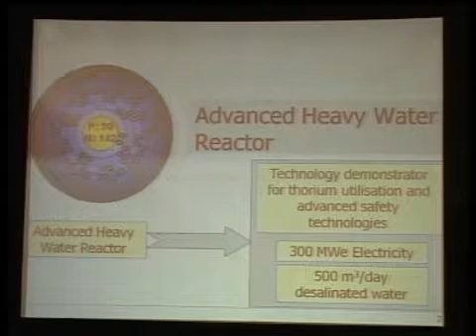We do produce electricity, 300 megawatts. In addition, desalination capability using the low grade heat coming from the steam cycle.

I have already indicated thorium utilization. These are the major design objectives: thorium utilization and associated technology development. And this reactor, why we have configured it the way I am going to describe a little later.

Basically, a boiling water cooled reactor, pressure tube type of configuration, vertical geometry. We thought we should better make use of the well known pressure tube reactor technology, which we have been operating for such a long time, building also for such a long time.

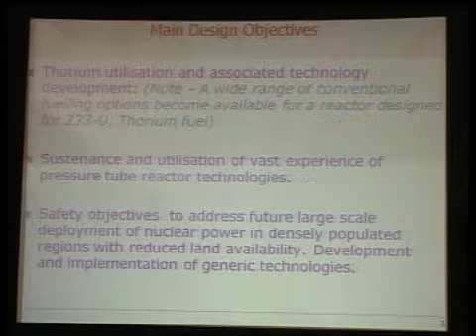We are having 18 pressurized heavy water reactors under operation today. 4 of them are now under construction, covering a range of 220 megawatt to 540 megawatt under operation, and 700 megawatt under construction.

Now, having defined this, when we thought of thorium as the main platform which will be used for this type of reactor design, we conceived that for large scale deployment of thorium, which will be the mainstay of the Indian program in the future, and also which we feel in the post uranium era, thorium could provide a very valuable role in continued sustenance of nuclear power.

We felt thorium will come into picture, really speaking, when the number of reactors in the world have grown very, very large, particularly in our country. Surely there is a huge requirement, and so you have to cater to a scenario when thorium exists.

Also, we have to cater to a scenario when a large number of reactors exist, and that's where for a densely populated country like India and many other parts of the world, we have to have some kind of more detailed thinking about the kind of reactor we must be building.

And we can't be certainly demanding sufficient land to provide for the exclusion radius, and around the exclusion radius, sufficient amount of restrictions perhaps in the emergency planning zone, which as we know today is going to hurt us even in the very near future.

And therefore, the last bullet you can see: the safety objectives of this reactor address future large scale deployment of nuclear power in densely populated regions with reduced land availability. Development and implementation of generic technologies meant for this purpose were a part of this AHWR design.

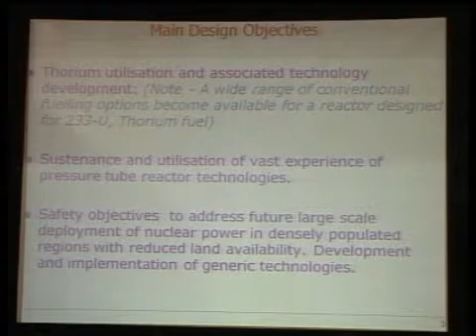We thought of it 2 decades ago, but post Fukushima this seems to be so relevant today. Well, I already said this is a 300 megawatt reactor, vertical pressure tube type, boiling light water cooled and heavy water moderated reactor. Why boiling light water?

Because we felt pressurizing heavy water per se means you have to contend with a system for recovery of tritium as well as the heavy water, which will certainly come out from some of the points, and this is a costly system.

You don't allow it to go away, but you have to recover it. Secondly, in presence of thorium, the large absorption cross section in light water really doesn't matter much. Thorium itself absorbs neutrons, so the contribution of light water vis-a-vis heavy water as a coolant really doesn't make much difference.

That's where the boiling light water coolant makes life very simple. The boiling light water can go straight to the steam drum, and unlike a pressurized heavy water reactor, we do not have a steam generator in the way. This produces 65% of power from thorium in this plutonium-thorium version.

As I said, this reactor can be designed for a range of fuels. Another version I will be talking about is the low-enriched uranium and thorium version, where the percentage of power from thorium will be somewhat lower. There are several passive systems I will come to, one of the most important being a passive shutdown system to address insider threat scenarios, which I'll touch on a little later.

It has a design life of 100 years. In fact, other than the zirconium alloy components which cross the core, there is nothing which really degrades. We have made sure in the choice of materials, in the choice of pre-stressing for the reactor structures, and most of the welds are now under development for very low residual stress configurations. Therefore, we are now reasonably sure that this design life can be achieved, with a lot of in-service inspection and maintenance capability.

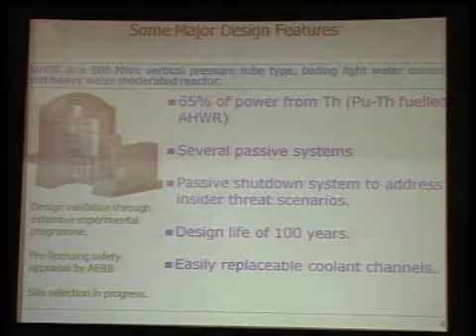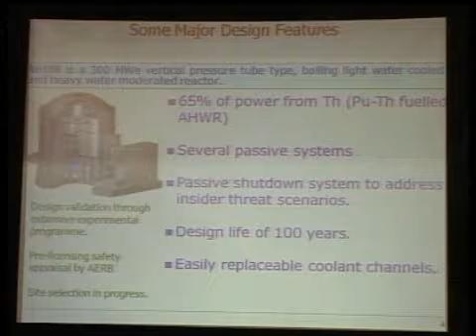On the left-hand side, you can see the status. The design validation has been carried out through an extensive experimental program. We had a peer review of the design done by the Nuclear Power Corporation of India Limited quite a few years ago, and in-principle pre-licensing safety appraisal was conducted by AERB. They suggested quite a lot of improvements or further validations, and all that has been done. Site selection is in progress for this particular reactor.

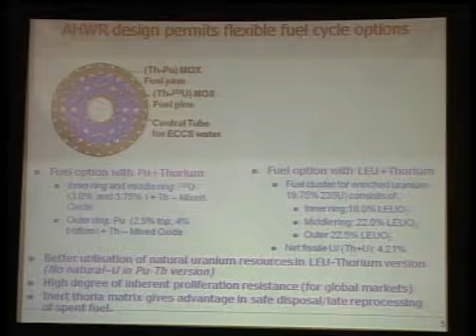Well, this shows the fuel cluster. You can see there are 3 rings. If we are using thorium and plutonium, the inner 2 rings, the blue colored ones, contain fuel which is mainly uranium-233 based fissile material and thorium, and the outer ring contains plutonium.

On the other hand, if you use low enriched uranium, then you have low enriched uranium in all 3 rings, because we provide 20% of the fuel in the form of uranium, which is itself 19.75% enriched, and the balance 80% is just thorium oxide. So the fuel contains some amount of U-238, some amount of U-235, and mostly thorium.

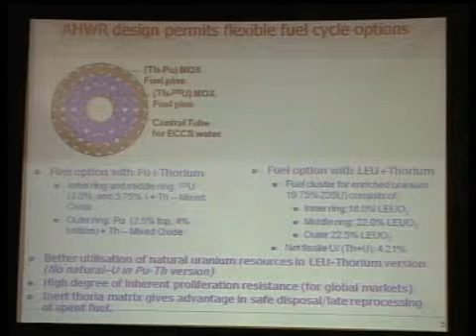In both configurations, you can see in the two columns information about the enrichment values, typically around 3 to 4% enrichment. One important feature is that the uranium-233/plutonium enrichment is in the outer shell of the plutonium option. We are providing a kind of variable enrichment.

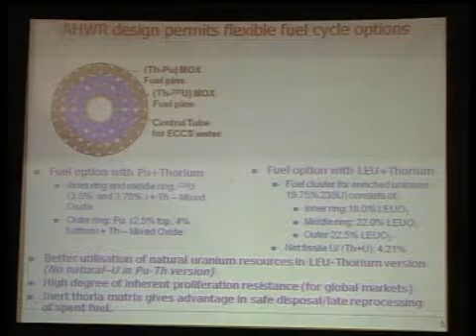The bottom, where you have mostly the water phase, has higher power density, so we provide 4% enrichment. The top of the fuel is enriched only to 2.5% to match the heat generation with the heat removal capability, which is mostly a steam-water mixture at the top.

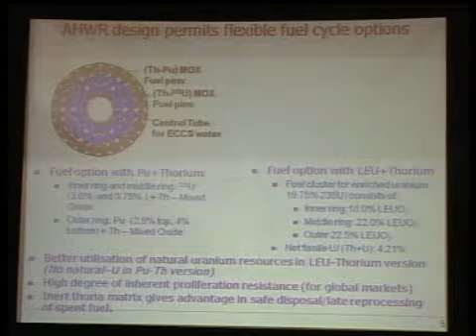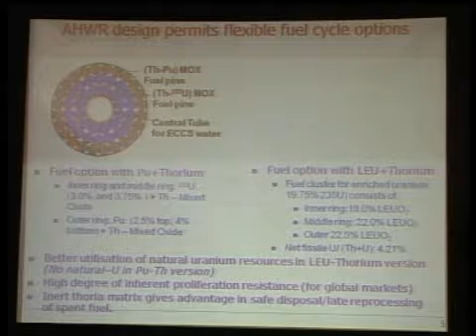We have carried out several fuel cycle calculations, which I am not going to include in this presentation, but it does turn out that it makes better use of the natural uranium. After all, if most of the power comes from thorium, you would only expect to have this kind of scenario. Thorium provides inherent proliferation resistance for those markets where it really matters, particularly if you look at the low enriched uranium thorium version.

To begin with, if somebody does reprocessing, if he is at all able to dissolve this fuel—very difficult to dissolve this thorium oxide—whatever he gets in hand will be low enriched uranium at 19.75%, considered good enough to be proliferation resistant, a kind of diversion-proof material, and the balance is all thorium.

The same fuel, after irradiation to 64,000 megawatt-days per ton, which is our target burn-up, will contain as much as 8% plutonium, with 8% of that being plutonium-238. The total plutonium will actually be less, because you start with only 20% uranium, so the amount of plutonium produced is one-fifth of what it could otherwise be. Minor actinides are also not built up, because you start low down the ladder with thorium. So there are several other issues associated with long-term disposal which are very favorably addressed here.

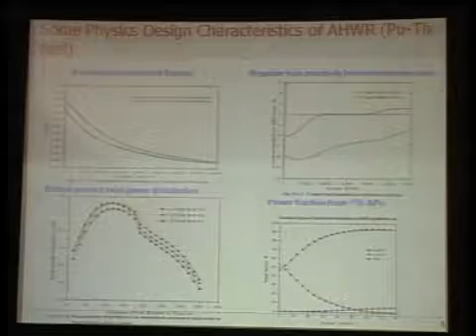To address the slightly positive void coefficient of reactivity, which happens if the coolant tends to boil off—and in this case, since it's a boiling water reactor, boiling is intended to happen—we decided to have a negative void coefficient for the entire range of operation, and this has been achieved with a lot of great effort.

On the bottom left hand side, you can see the bottom-peaked axial power distribution. This is because of the two levels of enrichment in this particular fuel for plutonium. Therefore, more power is produced in the bottom half, where water resides, since most of it is actually water, and steam starts forming midway upward. So it makes good sense to have a differential enrichment for the fuel.

The bottom right hand shows the proportion of power shared across plutonium and thorium. You can see the red curve—plutonium starts burning very fast and gets depleted. Some people say it can be used for plutonium incineration. Although we are not in that business, we wish to use plutonium for the fast reactor program rather than for incineration. But still, for some people, it could make sense.

Uranium-233 keeps increasing in terms of share of power, reaching almost up to 80% towards the end. But on average, as I said, it produces about 65% of power across the core with different burn-up configurations. Interestingly, some power also comes from uranium-235, because uranium-233, after absorbing a few neutrons, climbs up to uranium-235, which also tends to start producing. That's the bottommost curve, which starts showing up after some time.

Now for safety, because this is the main theme of this particular talk—what should we do for safety? Fukushima is glaring, but of course all this was decided long back.

The first important requirement is that you must be able to shut down the reactor under all conditions—whatever happens, you should be able to shut down. And as I said, in pressurized heavy water reactors, we already have two fast-acting shutdown systems.

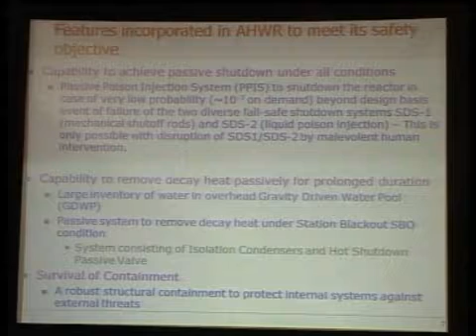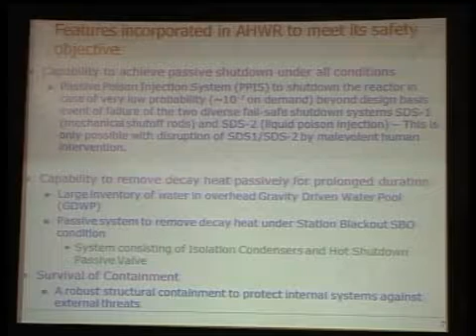Here, in spite of having a negative void coefficient, we have retained the two systems. One mechanical shutdown system: a clutch gets released if a power failure takes place or under some signal condition, and the mechanical shutdown rod drops. And a liquid poison injection system: once again on a signal, the liquid poison gadolinium nitrate, stored in a high pressure vessel, enters the core through nozzles.

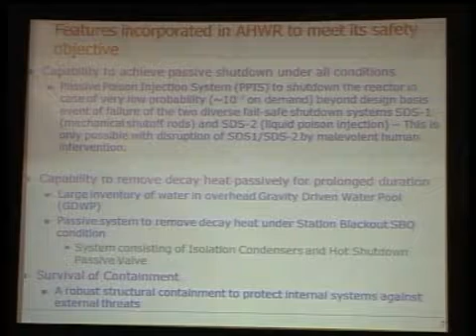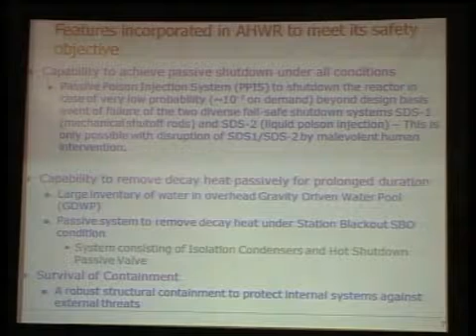Failure of both systems together is extremely low, 10 to the power minus 7 on demand. If there are 1,000 reactors operating for 1,000 years, even then you will not get one failure of both happening together. So then why are we considering a scenario of non-availability of both SDS1 and SDS2?

It's again a kind of scenario one could find in a large scale deployment scenario, with a very large number of reactors, where some odd things may happen. That odd thing is an insider threat, which I think one cannot perhaps rule out. Today we can provide enough physical security—it exists—but one could consider that electronics is something one could play with. Therefore, we assume a scenario of both SDS1 and SDS2 failing, and that's where a passive poison injection system comes into action.

Now, once you are able to shut it down, whatever happens, there is an important requirement to remove the decay heat. The bottom line in Fukushima was not the earthquake nor the tsunami—it was station blackout. We have to have a scenario where, without any power in the reactor, you should be able to remove the heat from the core, and that's where the passive systems come into action.

This has been proven even in existing reactors—particularly in our country, we have demonstrated enough margin for removal of heat after station blackout. Time-wise, we have enough margin, and in that time frame, one could bring in additional sources of cooling. But I'm talking about AHWR, where we have deliberately designed it to accept a very large period of station blackout, as mentioned here.

Ultimately, the containment must survive whatever external threats come, whether earthquake, tsunami, or any external aggression, because that's where all these passive systems are located. These are the three primary requirements which any reactor in the world, if it possesses, will be safe against most threats: internal, external, and man-made threats, which is most important.

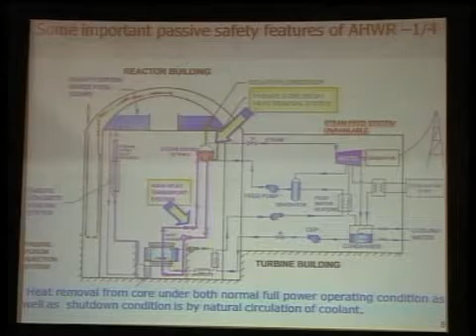As you can see, if you look closely, there's a desalination plant heat exchanger also sitting there. But the green line, the long arrow on top, indicates the path taken when there is a failure of the decay heat removal through the normal mode of the condenser.

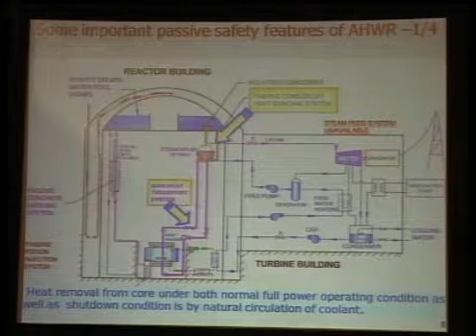Using natural circulation, decay heat can be easily removed in a large pool of water sitting right at the top - about 8,000 cubic meters of water inventory - which serves as the heat sink for a range of scenarios, and also provides the emergency core cooling system water for low pressure injection purposes.

Talking about the emergency core cooling, you can see the sources of water. Plenty of arrows there - one points to the top, one points to the emergency core cooling system high pressure injection. There is high pressure water injection in case you have a failure of the piping, cutting in at 50 bar pressure.

Further down, at about 5 bar pressure, you start getting water from the gravity driven water pool. We have not shown here, but we have a passive depressurization system to hasten the transition from accumulator to the gravity driven water pool, which contains practically unlimited water to survive for a very long period.

We also have a passive containment isolation system, so that if the environment inside has high pressure, the U-limb you see gets filled with water. So even without any power, if we are unable to close the ventilation dampers, these dampers get sealed by this water seal, and the environment inside is isolated from outside - you do not have to release radioactivity outside through this route. It can be done only in a controlled manner, which is anyway provided.

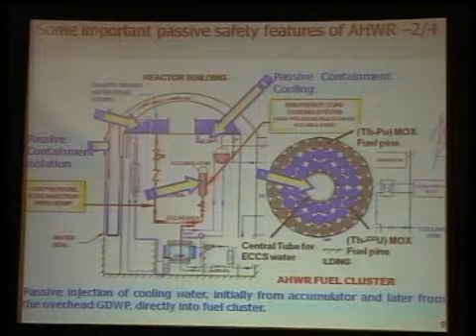This ECCS water, as you can see in the fuel sitting on the right hand side, gets injected right into the fuel through perforations, and that's where it's required and cools right there.

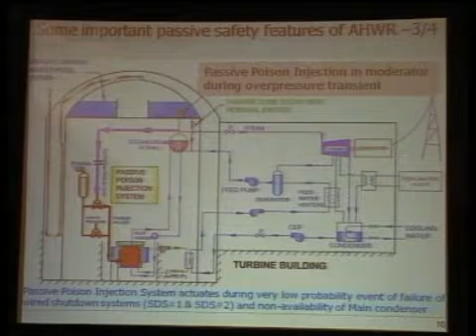Another feature is the passive poison injection in the moderator. Once there is a mismatch between power generated and removed - in any region, it could be a reactivity transient, control rod withdrawal without cause, or any reason because the shut-off rod does not drop in - the power increases, you are not able to remove the heat, and steam forms at higher and higher pressure.

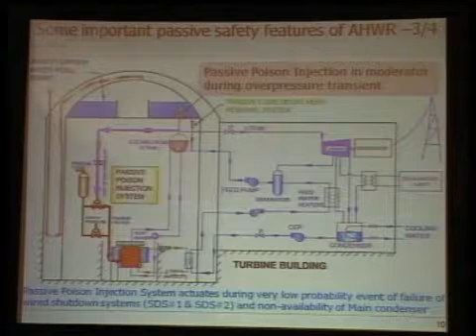That's when, progressively, things start acting without any operator action, without any instrumentation control, without any electrical power supply. Passive valves come into action to first try to remove the decay heat, which certainly cannot help in bringing down the pressure, starting about 70 bars.

At a pressure of 84 bars, as you can see the thick pink line at the top, the steam comes, ruptures a rupture disc, and acts on a valve, shown now in red, which opens the liquid poison injection line to the moderator inside the reactor vessel. The reactor gets shut down passively, even if the two shut-off rods SDS1 and SDS2 fail to act, or both fail under certain situations. The probability is practically zero, but we consider it anyway. This is how we shut down the reactor in the ultimate case.

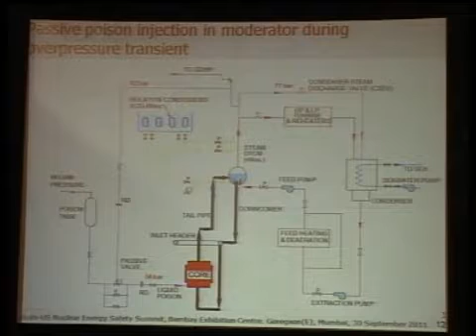This once again shows passive poison injection, which I won't repeat. This shows at a pressure of 70 bar how the steam goes to the steam turbine during normal operation.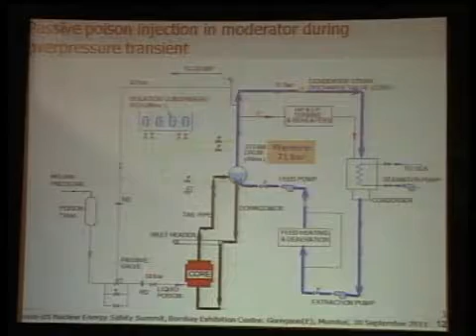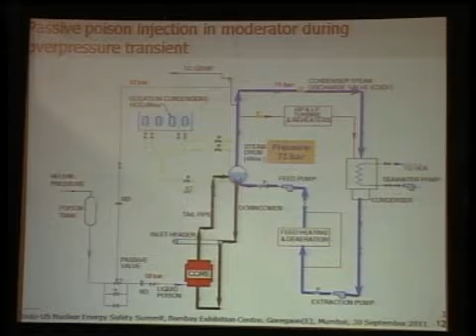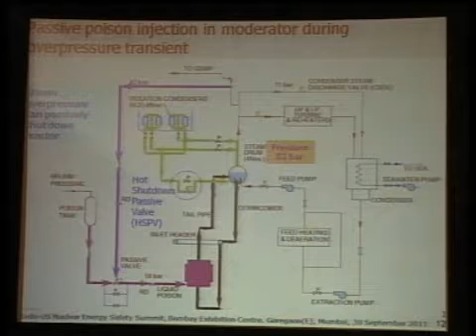If there is a shutdown without any significant threat, decay heat will normally be removed through the condenser, shown by the blue line. But if due to some reason there is a complete station blackout and the condenser and seawater pumps are not available, then pressure rises, and at about 74 bars it gets directed to the isolation condensers. Further on, at a pressure of about 82 bars, if the pressure continues to rise, shutdown comes through liquid poison injection.

All these features get translated into a variety of scenarios which we have examined, more than 90 scenarios. I am giving you only some of the enveloping ones.

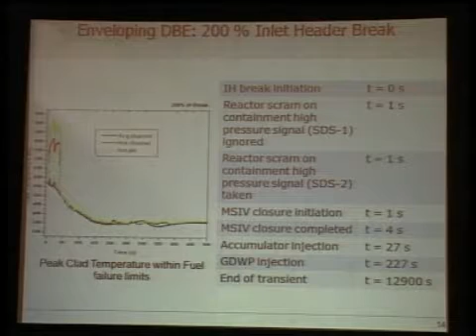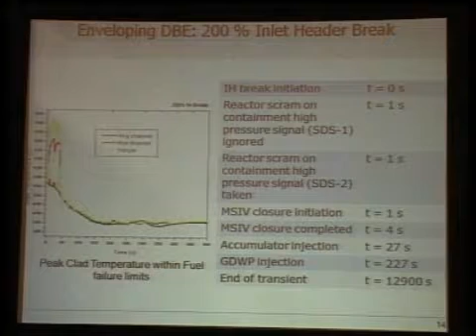Design basis accident: 200% inlet header break. We have a line of 600 millimeter diameter, our inlet header, and we assume it suddenly breaks into two. What happens then? This shows the clad temperature in the worst channel, average hot and hot pin also. Temperatures remain within 900 degree Kelvin for the initial few seconds, then drop below normal operating temperature and progressively get cooled. A very acceptable scenario, no harm done.

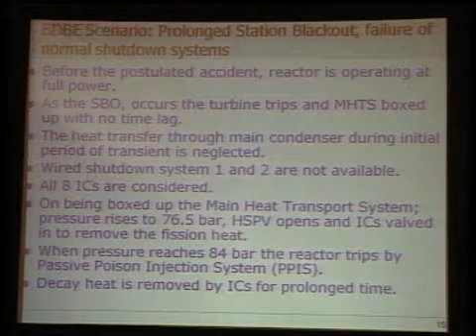In the beyond design basis event scenario, we assume a prolonged station blackout along with failure of the normal shutdown system. There is a station blackout for some reason, we are not able to drop the shut-off rods, nor does the poison come into action, and the station blackout continues for a long time. This is what this whole set of bullets describes.

Now, all these curves I am mentioning are not just theoretical calculations. We have carried out a very large number of experimental validations over the last 10 years. A huge amount of work has been done with large experimental facilities, as you can see in these bullets. So many facilities have been set up, not only in BARC — part of it is actually the BARC facility at the NPCIL R&D center in Tarapur.

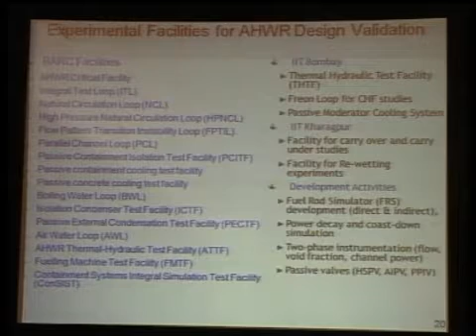We have joined hands with IIT Bombay and IIT Kharagpur, and there are several development activities which have been carried out, apart from thermal hydraulic experiments and fuel rod simulators to simulate the full power delivery.

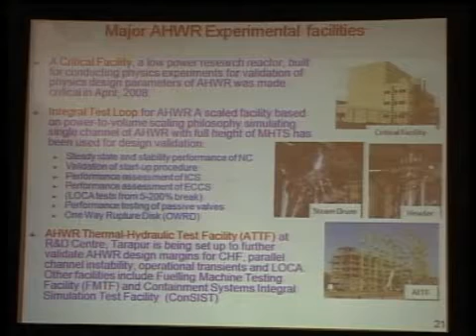The Integral Test Loop is a large 40-meter tall structure where we have set the natural circulation height of this reactor. The third major facility now coming up will have the capability to deliver 15 megawatts of thermal power to the fuel clusters, to simulate practically a burnout situation and finally derive the realistic margin going into accident conditions. This is being set up at Tarapur.

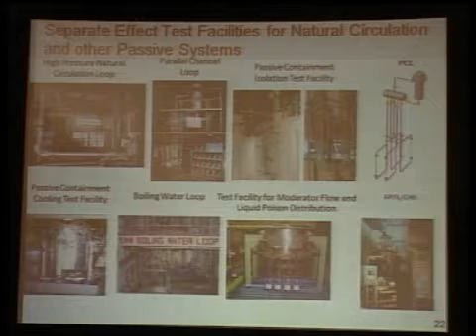These are all several separate effect test facilities for natural circulation and other passive systems—several loops and facilities. Many of them have parallel channels, some have single channels.

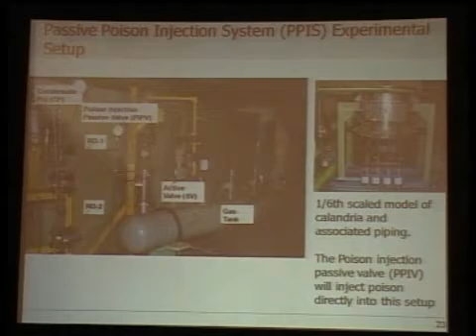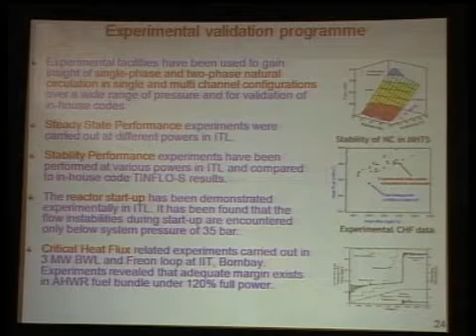I talked a lot about the passive poison injection system. That valve needed to be developed, and this is where we did it. There are many other experimental validation programs whose output comes in the form of fundamental studies on single and two-phase natural circulation, steady state performance, stability under various transient conditions, reactor startup conditions, and determination of critical heat flux, which is also a very important parameter.

In addition, several components and systems have been developed. For example, a conductance probe—how do you find out in a pipe how much void is there, how much liquid, how much steam—and void reactivity feedback.

I've discussed a lot about what we have done for AHWR. Now let me summarize my views.

I must say, and I am sure Mr. Jain will mention in the afternoon, all the Indian reactors offer robust designs that have been verified to be either immune to, or safely address, accident sequences that occurred at Three Mile Island, Chernobyl, and Fukushima. However, large-scale global expansion of nuclear power is essential and inevitable. In the short term there may be ups and downs like the share market, but it will happen—it has to go up. There is no other way.

In a large-scale deployment scenario, which we envisage for India, today we have barely 20 reactors. I expect this number to go up to almost 500 or 600. If we go for smaller reactors, it could be even higher. So there, what do you do?

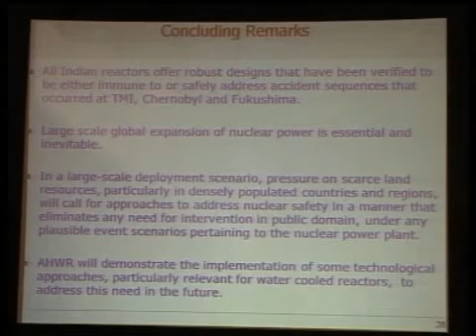Pressure on scarce land resources, particularly in densely populated countries and regions, will call for approaches to address nuclear safety in a manner that eliminates any need for intervention in the public domain, just like any other industry, under any plausible event scenarios pertaining to the nuclear power plant.

In fact, my vision is—if we have this type of reactor system in hand, can we not build a nuclear power plant on land perhaps vacated by a coal-fired station, where you have access to the grid, cooling water supply, and trained manpower—an extremely economic proposition. I feel convinced that if we master this technology, if AHWR is shown to demonstrate all of this satisfactorily for, let's say, a decade or so, we will be ready to get the regulators and the public convinced that yes, this is doable, and that's my intention.

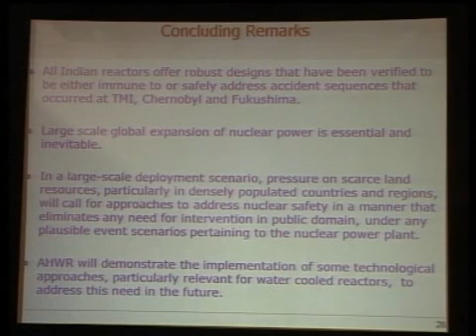And therefore, the last point is that AHWR will demonstrate the implementation of some technological approaches, particularly relevant for water-cooled reactors, to address this need. There will be other designs for other coolants. Surely our fast reactor program is also addressing passive decay heat removal systems, and that will also come through. So this is my final conclusion. Thank you very much.